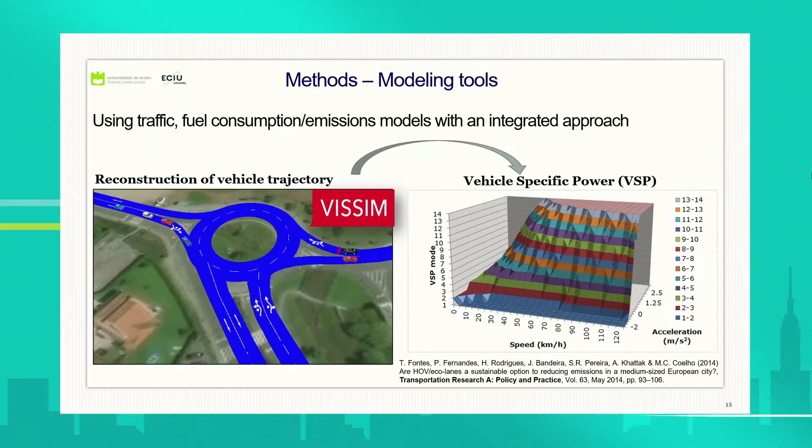For that, we use an integrated approach: traffic and fuel consumption emission models integrated. For example, we need to reconstruct the vehicle trajectory, not only for conventional vehicles but also automated vehicles, and we link this with an emissions methodology called vehicle-specific power.

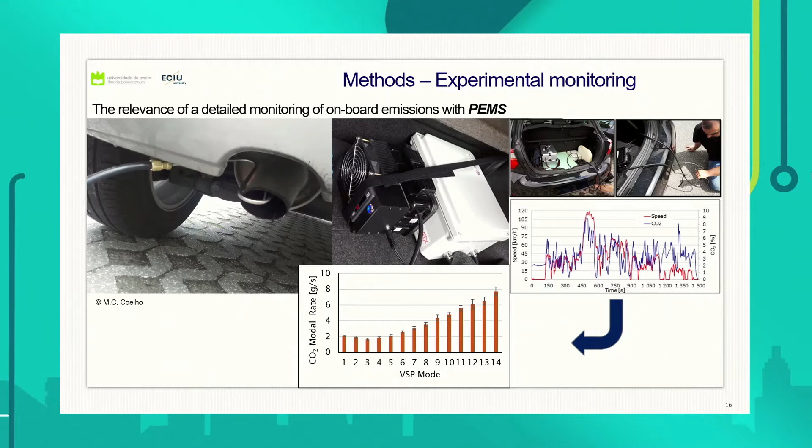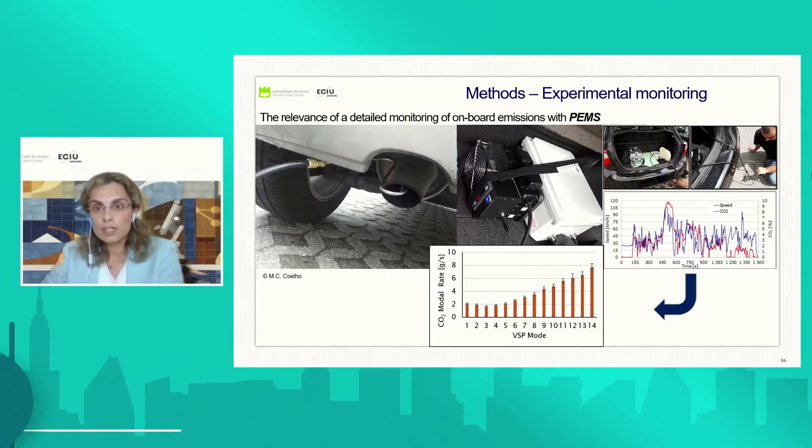For example, vehicle-specific power modes 1 and 2 are related to the deceleration modes of the vehicle. If we go up to VSP modes 10 to 14, these are related to periods when the vehicle is at high speed and very high acceleration. So we can correlate vehicle dynamics with emissions.

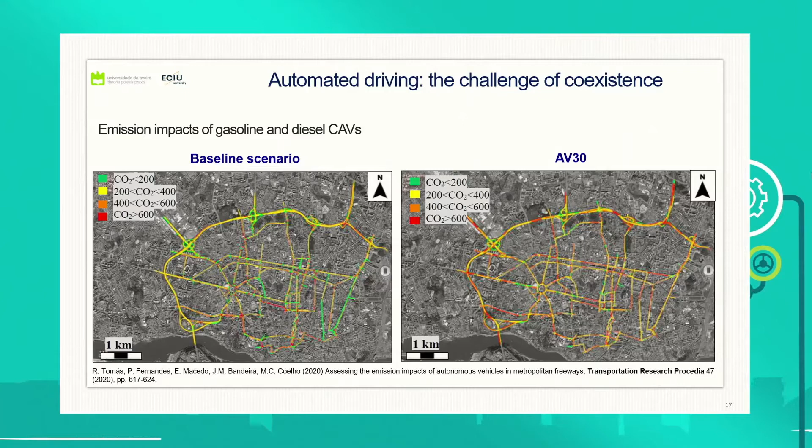Now I will briefly present some results of our research, namely papers on the emission impacts of automation. This work specifically explored the environmental impact of automated vehicles along a metropolitan road network, which included a freeway corridor in a metropolitan area. We implemented scenarios with different automated vehicle penetration rates in this corridor, using 10, 20, 30% of automated vehicles, then calculated CO2, NOx, and other pollutants.

The main concern here is that we will not have a turnout from 0% to 100% automated vehicles. Meanwhile, we'll have the challenge of coexistence between automated vehicles and conventional vehicles. What we found is that the challenge relies on that coexistence. Automated vehicles yielded small savings in emissions when automation levels were below 30%. CO2 emissions per unit distance slightly decreased for these low penetration rates, but they can actually increase if automated vehicle penetration rates are around 30%, because conventional vehicles have to coexist and adapt their driving to the existence of automated vehicles.

I should mention that in this work, we considered the automated vehicles to be gasoline or diesel, and I will further present results with electric automated vehicles. Besides the challenge of coexistence between automated vehicles and conventional vehicles, we have different driving situations.

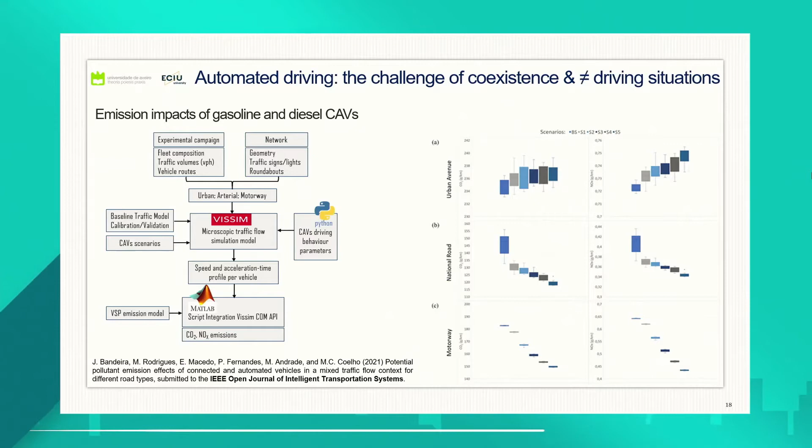So again, we calculated the emissions through the vehicle-specific power detailed methodology, and here we quantified emissions for connected automated vehicles in different road types: urban roads, national roads, and motorways. Here you can see some of the results: the first set of graphics for urban roads, then in the middle national roads, and at the end the motorway.

Besides the baseline scenario, we considered other scenarios of penetration of automation: 10, 20, 30, 50, up to 90%. What we found is that automation can significantly influence environmental performance, either positively or negatively, depending on the driving settings. We concluded that the most negative impacts occur in urban situations, where total emissions of CO2 and NOx can increase by around 4 to 8%.

The big advantages in terms of automation occur with automated vehicles on national roads and motorways. For example, on motorways, if we optimize the speed to around 90 kilometers per hour, we can have reductions of up to 18% of CO2 and even 32% of NOx.

As I said, the first step was to separate the automation factor itself, and now we can rely on joining automation with electric mobility, because we thought this could be an added advantage besides having only gasoline and diesel automated vehicles.

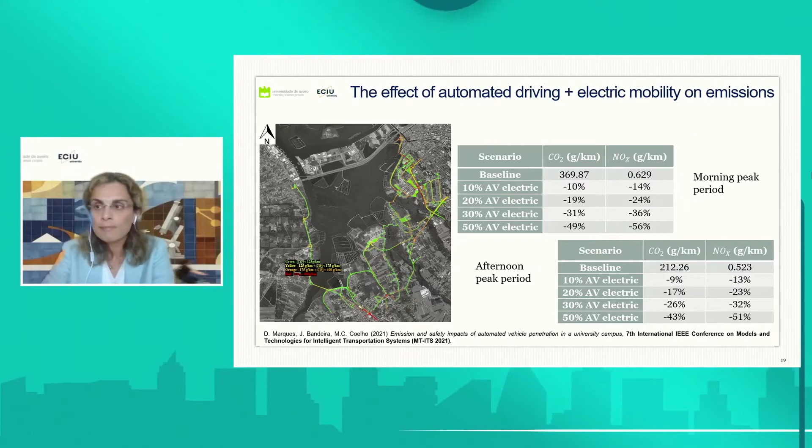So we were able to say: okay, electric mobility together with automation have some advantages in terms of emissions. What about air quality? That was the next step, to understand the effect of automated and electric mobility on concentrations.

So here we calculated nitrogen oxides and also CO2 emissions, and developed several scenarios related to the penetration of automated mobility and electric automated mobility. Basically, with electric automated mobility, we found that we could achieve emission reductions of about 30% for NOx and CO2.

And when we looked at the air quality parameters, namely concentrations, we can obtain a reduction in NOx concentrations if we have automated and electric mobility. So the obtained results really highlighted the ability of automated electric vehicles to improve urban air quality.

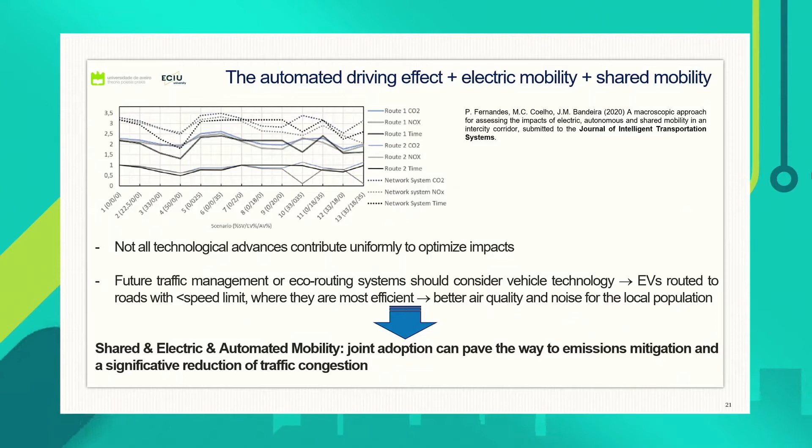So here, besides automation and electric mobility, let's add another layer called shared mobility. This research aimed to study and evaluate the environmental aspects of the penetration of shared vehicles, electric vehicles, and automated vehicles. With realistic combinations of alternative mobility penetration scenarios, we could have a range of -22% to +6% for CO2, and a range from -35% reduction for NOx, but also an increase of 5% in NOx.

So here we could analyze, in terms of this increase of emissions, the critical sectors. Although increased shared mobility and electric mobility are generally positive, it is necessary to be aware that these new mobility forms can lead to potentially adverse emissions in some sections of the network.

For instance, I can increase the capacity on highways, but basically, if I have a high penetration of electric vehicles, they can be more efficient at lower speeds—for example, on national roads.

So basically, I can join shared, electric and automated mobility, and this joint adoption can pave the way for emissions mitigation and for a significant reduction in traffic congestion.

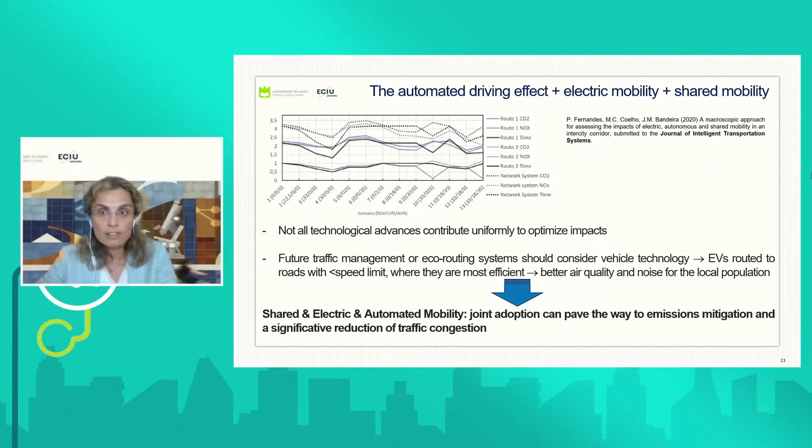So basically, if we go from only a use approach to a life cycle approach—considering not only the use of the vehicle, but also the life cycle: production, use, and end of life—so all the steps, when we look into a shared, electric and automated vehicle, we can use life cycle assessment to quantify all the impact.

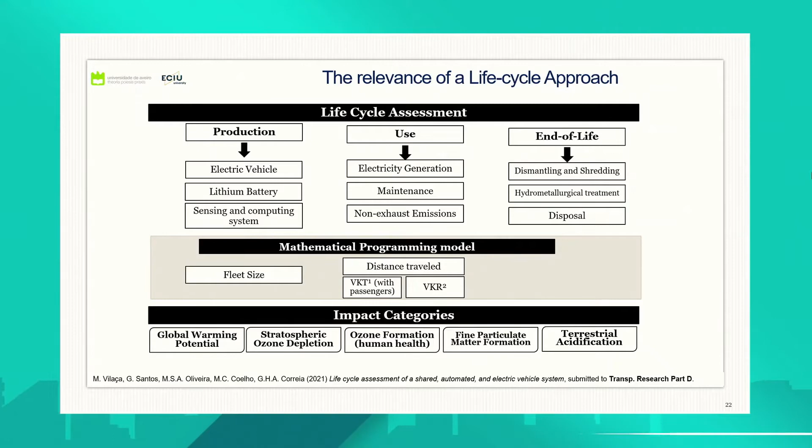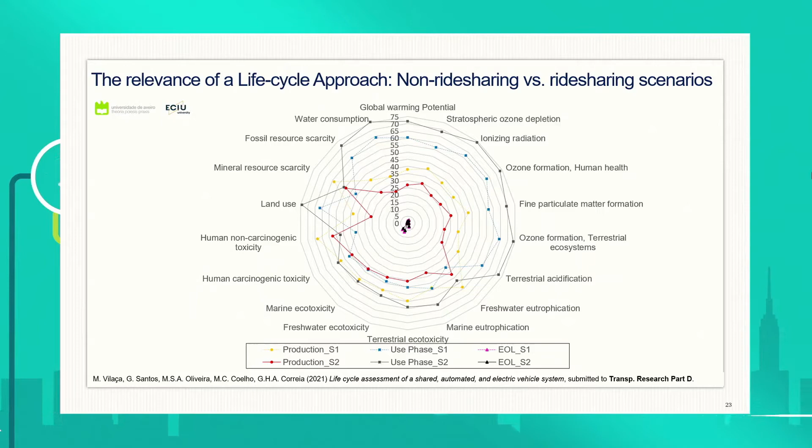So that's what we made here in this work, a research that involves collaboration with the University of Coimbra, also in Portugal, and TU Delft in the Netherlands. We applied this life cycle approach, the entire set of processes involved in shared electric and automated mobility, to two different vehicle seating capacities: non-ride sharing with only one passenger, and 4 passengers for ride sharing scenarios. We can say that the maximum vehicle capacity yielded a potential reduction of more than 41% on the system environmental impacts compared with single user trips. So a higher vehicle capacity in an intercity shared automated and electric vehicle mobility system has a significant reduction in fleet deployment needs and a reduction in life cycle environmental impacts.

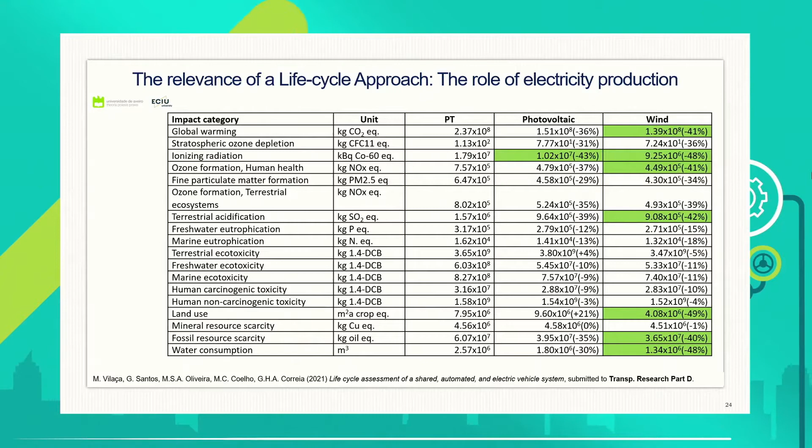Also dealing with this, we looked into the role of electricity production. You can see in green the highest impact categories that we can decrease. If we compare the Portuguese electricity production mix with 100% photovoltaic and 100% wind power electricity production, we can conclude that electricity generation based on wind power is the most promising way to reduce environmental impacts, with the potential to reduce up to 49%, depending on the impact, compared with the Portuguese electricity mix.

So we can conclude, until now with our research, that for CCAM emission impacts, we have the concern with the transition period, the coexistence between automated and conventional vehicles. If we have automated vehicles with electric vehicles, we have a higher potential to reduce emissions and improve air quality. And if we introduce these alternative propulsion modes, we have to keep in mind that this is a promising strategy to reduce emissions, but it does not imply lower traffic congestion.

So this integration with behavioral change techniques like shared mobility is a key factor. Because what is the mobility that we really want for our future?

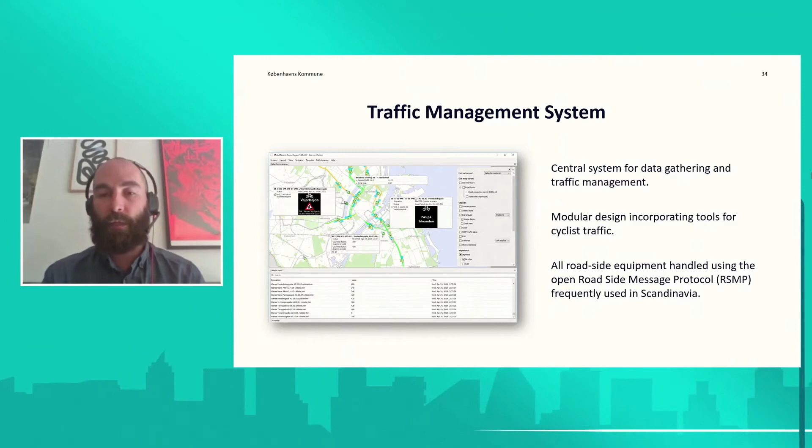We're trying to get as much data as possible, so counting data, travel time data, that kind of stuff. We have experiences from technologies which are pretty good for cars, like loops, coils, radars, but those don't work on cyclists—they're too small and when grouped together it skews the data. So we're looking into camera and automatic image recognition. Here I want to pose another question: how can connected and automated vehicles help detect cyclists and share that data with traffic management or road authorities?

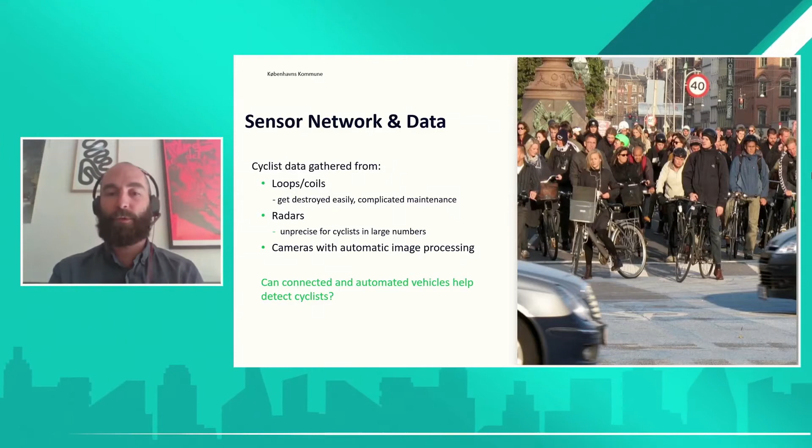What technologies can we get from automated vehicles? Maybe LiDAR is an option. Some progress has been made on automatic image processing, which is also related to automated vehicles, so that's very interesting for other modes as well. And can these vehicles also detect cyclists to a good enough degree?

On scenario management, we are adjusting our traffic signals and our whole infrastructure to a larger degree to accommodate the slower speeds of cyclists and the variations in amounts of cyclists that we have. We foresee the city becoming more and more adjusted to cyclist traffic rather than motorized traffic, which I'll come back to in a minute.

We've just finalized development of a traffic model—a mesoscopic, multimodal traffic model, one of the hardest phrases to say. It models multimodal trips, so trips that start off as pedestrian trips, then become car trips or cyclist trips or public transport, and then end as pedestrian trips again, for example. So it models the whole trip regardless of which mode is used.

At the moment, this model does not take into account automated vehicles, even though it's pretty cutting edge. This is one very interesting avenue of further development—to look into the future at how we can model traffic with automated vehicles, and the previous presentation was very interesting on that point.

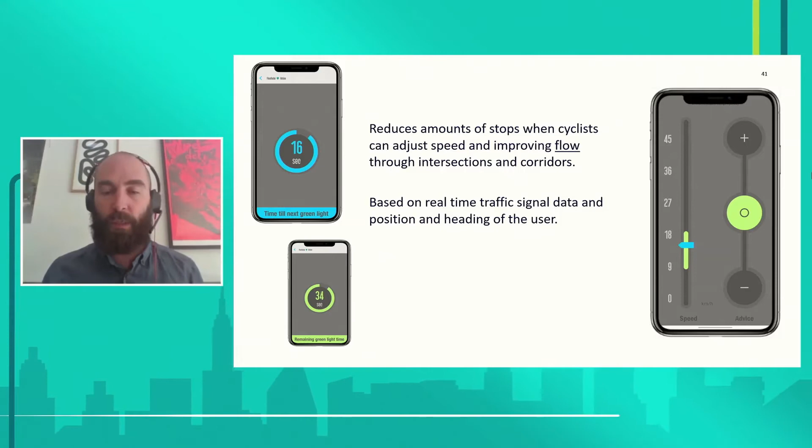So we are building solutions and services to improve cycling convenience and to promote the modal shift from cars to bicycling. But as I mentioned, there will always be cars and trucks, emergency vehicles. There will always be a need for motorized vehicles, basically to transport people, whether it's in the future, the share of which will, to a larger degree, be the automated vehicles.

But what I want to have people contemplate is how can these vehicles improve the conditions for cyclists as well, further than just by, let's say, the public space reduction, but also in their functioning in themselves, in the data they provide or gather, in the way they detect, also for traffic safety reasons. Do they ignore cyclists when driving forward? Of course they will not, but what are the safety settings? How will they manage a city that is very heavily a cyclist city? Will they be at a standstill because maybe they see dangers all around them? This is an interesting question that I'd like to explore going into the future.

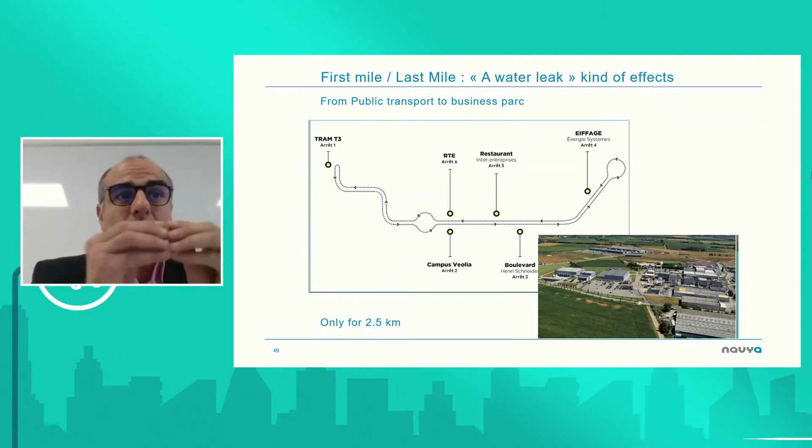We don't have the exact figures here, but we have seen that it was up to 20%, and it allowed people to say, when I come to the train, if it's raining, if it's hot, I can take these solutions and it allows me to go there. These solutions are always there, so we are doing dynamic planning to adapt the shuttles to be on time for when the tram arrives and to take people around.

This is one example, and I call it a water leak, because if you have a pipe of water, here it's mobility, and you have just one hole of 2.5 kilometers, you will use another solution to work around it. So with this first mile, last mile approach, we see it often - this is to block this leak of water. Most of our use cases are there.